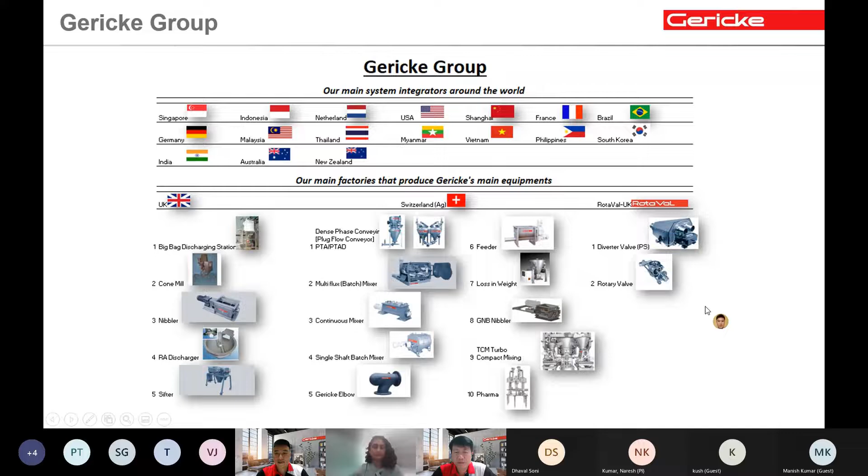All right, so INOS, Seema, you take over these slides. Thank you, Tom. I would like to introduce myself first. I'm Seema Soni, and I'm heading the customer support team at INOS. We started our journey in 2009 in India and have been a solution provider for pharma, food, logistics, and FMCG customers since then. We have our sales representatives and support people placed in Mumbai, Pune, Hyderabad, Bangalore, Chandigarh, and our head office is in Ahmedabad.

So we basically are close to our customers so that whenever there's an urgent breakdown for solutions and also for services, we can be in touch with the customer and make a visit to them immediately. Also, our technical staff is well equipped and well trained to handle IQ, OQ, DQ, FAT and SAT services as well. They are well trained for installation and commissioning that can be provided to the customers.

So we have been active in the pharma, food, and FMCG companies for a long time now, and we can provide solutions right from R&D equipment till packaging lines. So I think, yeah, Tom, you can continue now.

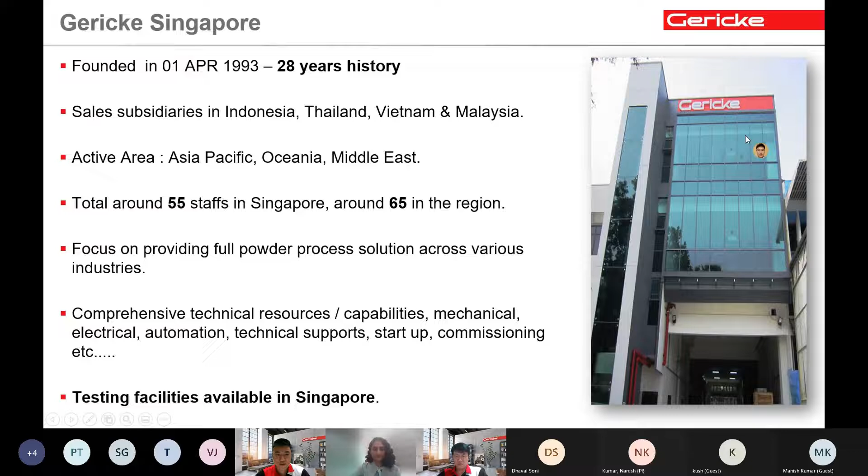And what is interesting here is if you have a look at our buildings over here, the second floor and the third floor are our test facilities. So if our clients or anyone has special ingredients or anything they would like to be tested out, always feel free to contact us and we can do the testing for you.

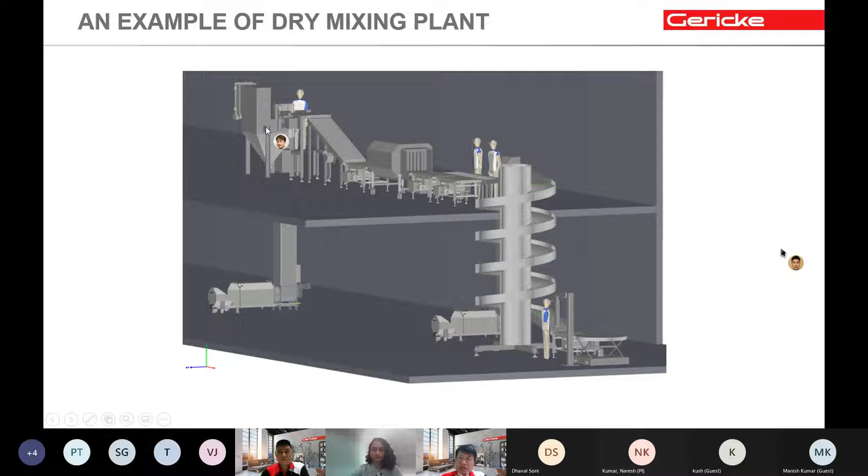In a typical plant setup, we normally have raw materials handling, where raw materials can come in 25 kg bags, 50 kg bags, or bulk trucks, and we have to deliver them up or on the same floor to a process level. From there, they pass through a wash, which we call ultraviolet if needed; if not, you go direct into a tipping station. From the tipping station, we deliver the powders to the mixing plant you see here. After mixing, we convey them into your filling machine. So this is just a simple setup of a simple blending plant. Of course, different factories have different unique requirements, and this will differ, and we are ready to customize solutions for you.

Tom, I'm just curious, sorry Tom, can I unshare your clip? Are you able to cancel your control already? Yeah, I just... yep, done.

Okay, thank you. So moving on, we cover how we handle raw materials. Today you may have already been handling raw materials that come in 25 kg bags or 50 kg bags. As you progress further and need higher capacity, you may want to request raw materials in bulk tankers. These are always available, at least in Asia—I know they're available for flour and for sugar. If you need this kind of technology due to capacity, we're here to help. We can help you convey the raw materials from a bulk tanker into a silo. The silo can be indoor or outdoor, with the right instruments, explosion protection, and so on, depending on the materials you're handling. This is one opportunity to save costs, because as your product consumption increases, instead of 25 kg bags you bring in a bulk tanker, saving costs in terms of raw materials handling.

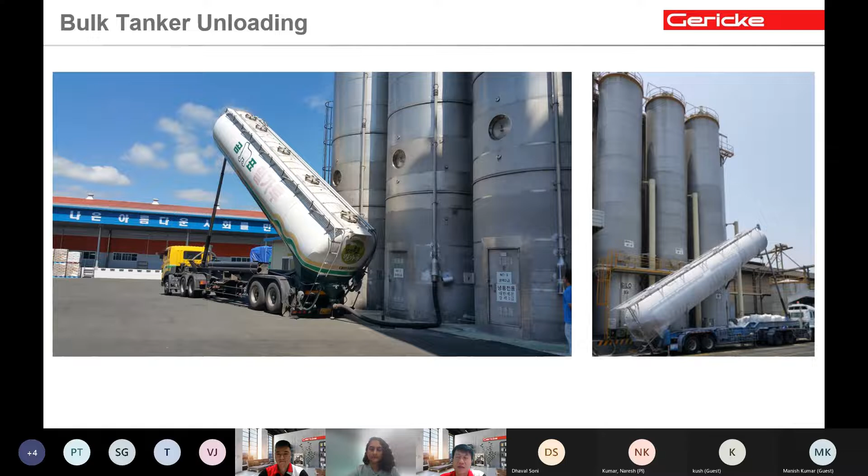For 50 kg bags and 25 kg bags, there are many ways to handle them. We start with operator safety first. When you have a lot of bags being tipped by operators, if you don't provide some sort of lifter machine, they will need to bend, and operators get injured easily, leading to medical insurance costs and so on. So nowadays, in more modernized factories, a lot of them are improving their safety by using what we call palletizing—something like a spring-elevated or even hydraulic system, where you put pallets of 25 kg or 50 kg bags on this machine. As bags are emptied from the pallet due to the weight, the spring lifts the pallet up. This way, the machine is calibrated so your operators always maintain a certain height and don't have to bend too low to pick up the bags.

Sometimes your raw materials come in on the ground floor, and your tipping station or process line is on the upper floor. You can choose to move these bags using a lift, forklift, or goods elevator. And sometimes this is not available, there's a technology in the market we call vertical conveyor.

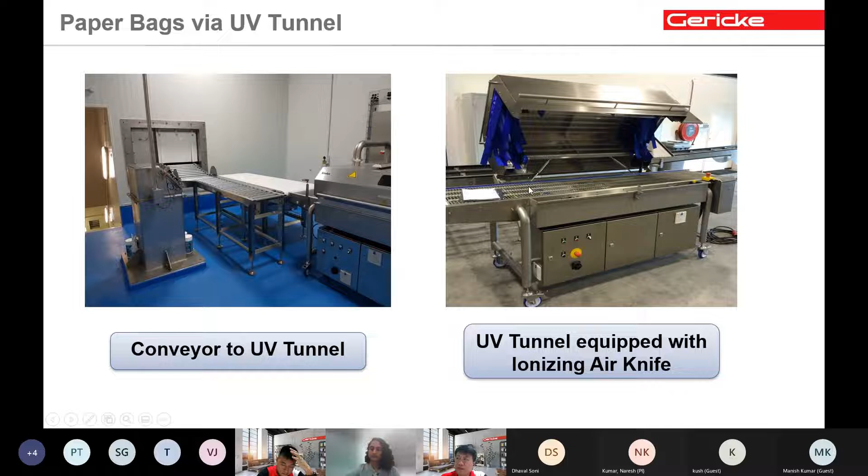Back to a more basic system. When you have 25 kg or 50 kg bag tipping, if you don't design them properly, you'll see that your operating area is always very dusty. Basically, what we recommend for a proper 25 or 50 kg bag tipping area is a tipping station.

A proper table for operator safety to rest the bags and cut them, and a filter located at the top of the tipping station itself, plus a fan to always create negative draft so that your powder does not leak out during the cutting or dumping process. This is a standard tipping station we recommend for 25 and 50 kg bags.

If you have big bags, you will need to handle them a bit differently. You will definitely have a hoist to lift it up to the discharge point. At the discharge point, you will either go for a vibrating table or a device called an agitator to agitate the powders to come down into the downstream system.

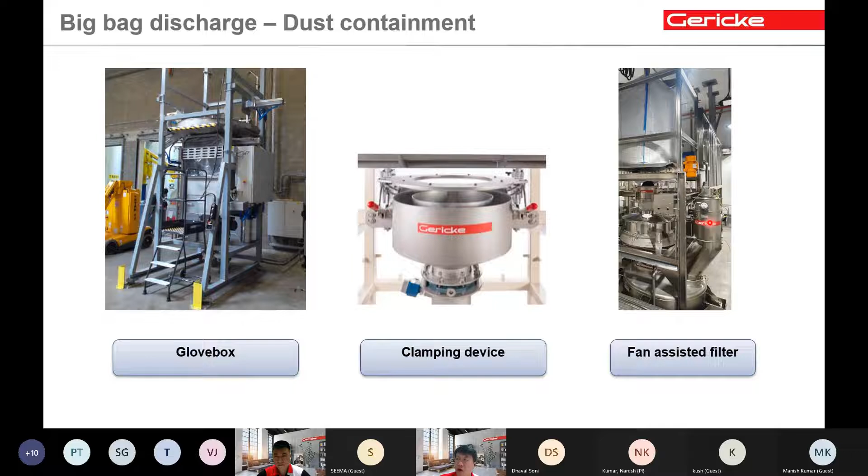Sometimes you'll notice a lot of foreign bodies in your raw materials and need to sift, but have no place to put a sifter. So on the same floor, there are solutions where you can combine a tipping station and a sifter at a height comfortable for operators to tip. This is what we call a tipping station direct to sifter solution.

We always recommend every tipping station come with a standard 40 by 40 mm grid. This prevents knives or other foreign bodies from entering the system. We can also put them on rollers so you can shift left to right if you have two destinations for operators to tip.

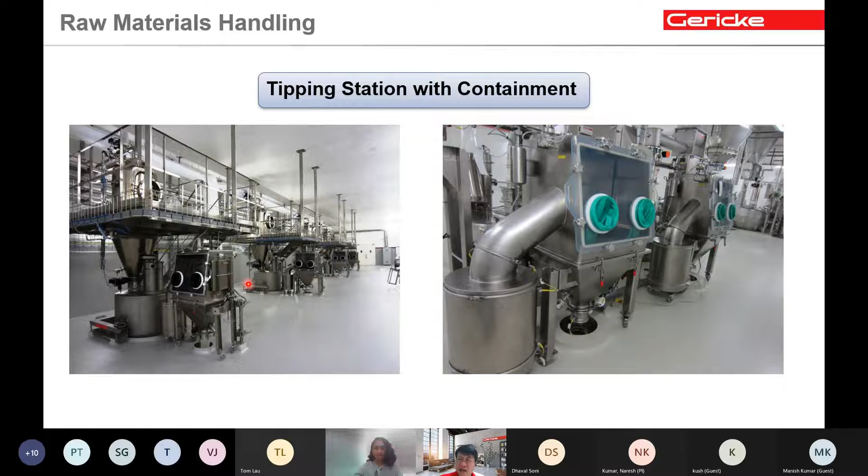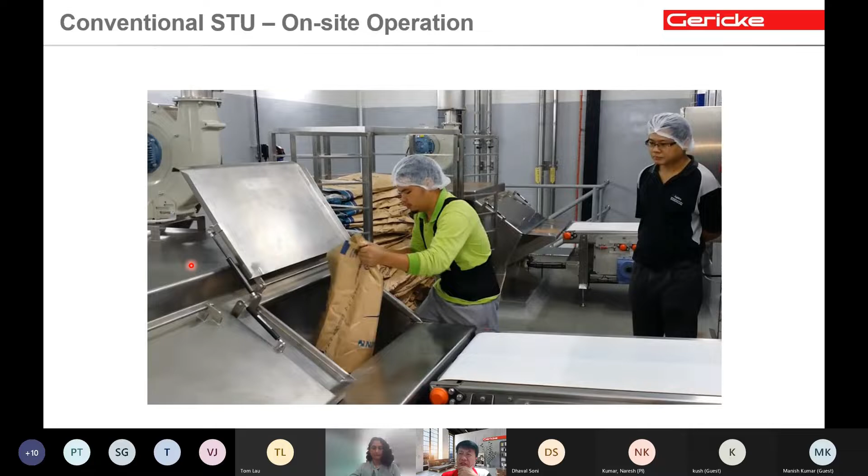I will show you how operators typically tip the powders. Normally the tipping station comes in, operators cut the bag and tip it, and there's a dust extraction system. This way the dust stays in the tipping station, maintaining a dust-free environment. This is a typical tipping station for 25 or 50 kg bags.

Today we also have another interesting solution with this kind of design, where the cutting is eliminated and the process is much faster. Let me show you this video.

As you can see, similar to earlier, the operator now doesn't need to cut the bag. The bag comes in on standby, the operator presses a button, the bag slides down and gets cut by itself. Then the operator just needs to lift up the empty bag.

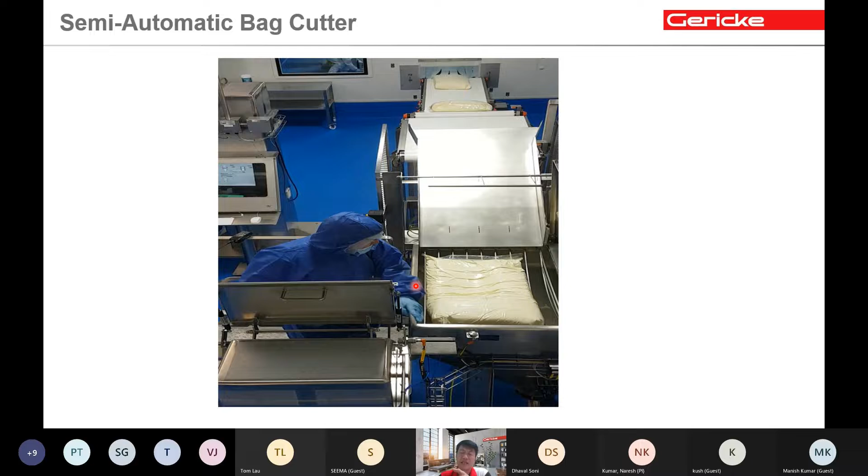This kind of setup, compared to the earlier one I showed you, is 200% more efficient. That means what used to require 2 operators can now be done with 1 operator, and you can easily achieve 6,000 kg per hour of throughput into the system.

For raw materials handling, you have powders in 25 kg bags, 50 kg bags, and big bags. Sometimes if you handle certain hygroscopic powders, like cocoa or sugar, when they sit in your warehouse too long and operators tip them, you'll see a lot of lumps. When you have lumps, your operator has to manually crush, separate, or delump them.

There's a device called a delumper, where instead of operators manipulating the powder, you pass it through this nibbler or delumper, which has a paddle that gently pushes the powder through a screen. This machine is designed to delump, not to mill, achieving 99% of the original powder's properties. So if you have lumpy products, you'll need a nibbler or delumper to achieve good product quality before introducing it into the system.

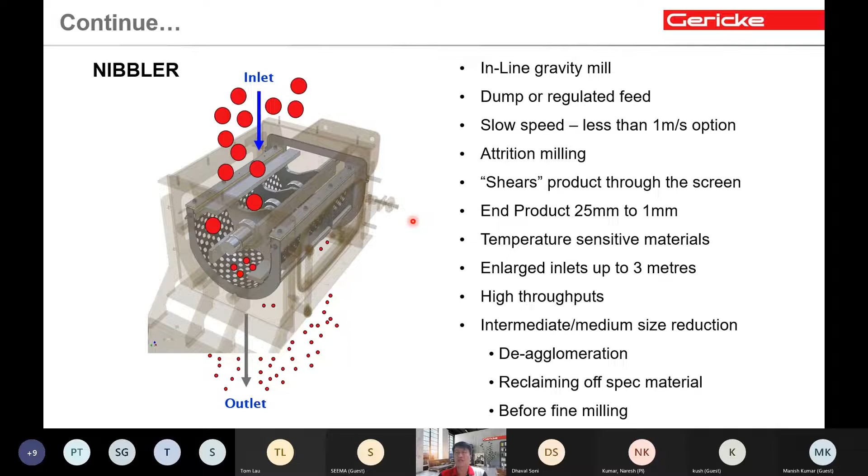I will show you how a nibbler works.

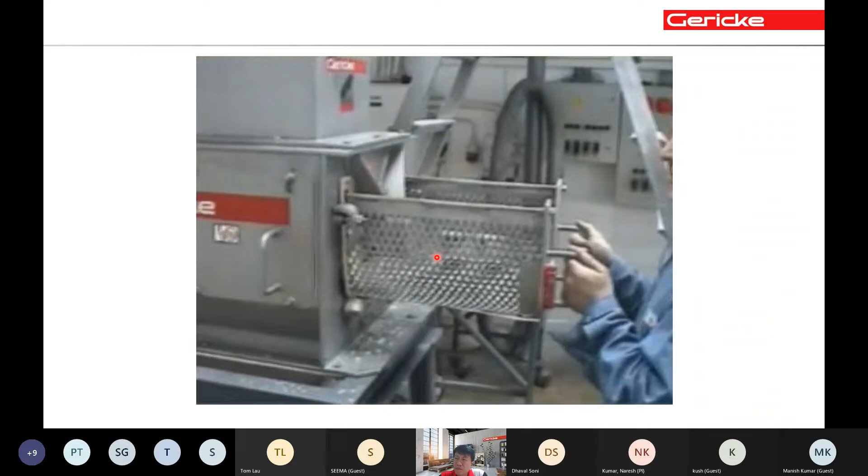It comes with a basket to control the screen size. So you can see now the very lumpy powders. By passing through this nibbler, we don't destroy the powders, but we try to delump it. So the word is delump.

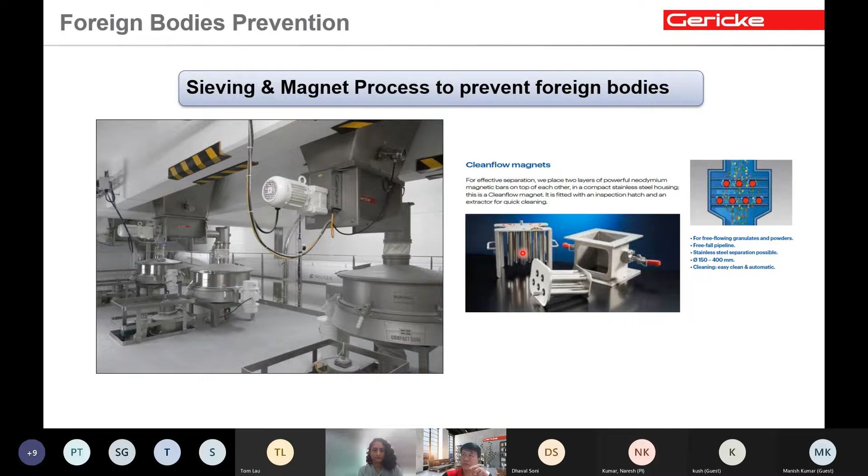Of course, to organize it properly, you start first with a 40 by 40 millimeter grid at the tipping station. This prevents anything bigger than that. After that, you pass them through a sifter, and then through a magnet. So a simple configuration of these three will give you the most basic foreign bodies prevention, and this is normally applied at raw materials handling, that means at the very front of the line. Then as you go down through your process, to your blending process, and then when it comes to your filling machines, at the very end, you will have a similar setup.

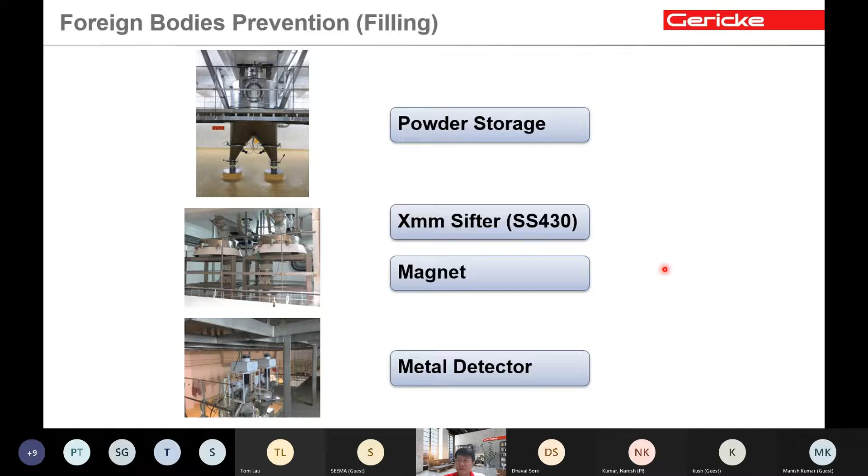This we call centrifugal sifting.

Another type for the same process is vibrating sifting. It works by passing the material onto a screen. The screen and the machine will vibrate, and the powder will pass through the screen and discharge downstream. So why are there centrifugal sifters and why are there vibrating sifters?

It depends on the powders. If your powder is really very challenging, sticky, or maybe not very free-flowing, we will recommend centrifugal sifters. Centrifugal sifters have the advantage of pushing not-so-free-flowing powders through the screen. The same difficult product may not work on the vibrating sifter.

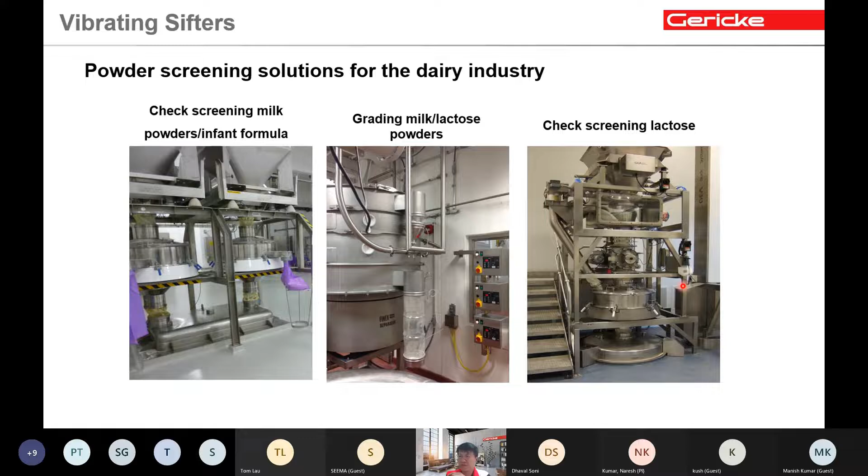To add on to raw materials handling, sometimes you have a process where you need to convey powders using air. Even at that point, you already start with foreign bodies prevention. The air intake, before it comes into contact with your powders, must pass through a HEPA filter — whether H7, H14, or HEPA filter standard, depending on the requirements. It is always recommended to put a filter before the air comes into the system and contacts your powders.

Foreign bodies prevention also applies to machines that are operating. Certain machines have very tight clearances — for example, a rotary valve, normally used in powder handling. Rotary valves today can also be a source of foreign bodies. To prevent this, we have developed a RotaSafe detection system, where if there's close contact, we will detect it and stop the rotary valve. This is also part of the foreign bodies prevention program, but applied to the equipment itself.

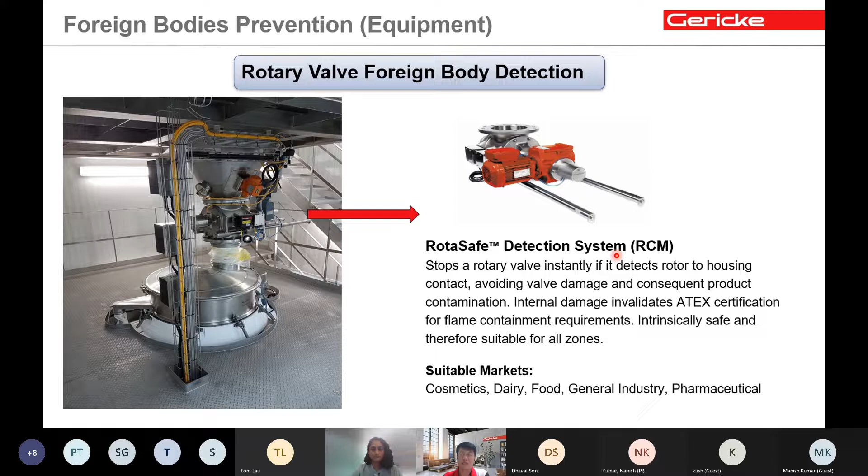Before I move on, there are two questions from the ground. One: how do we shift bulk powder from 25kg packs to the 4th floor, approximately 30 meters high, with a quantity required of 4 metric tons per hour? I recommend a tipping station at the ground floor, then pneumatically conveying them to a receiver that's 30 meters high. To shift something from ground floor to 30 meters, you have other options — you could put them on a pallet.

You can have your forklift going into the lift, operators moving in the lift, or a lift lifting up to 30 meters. But you can imagine the logistics involved. So a lot of factories today have a tipping station on the ground floor, and we just convey pneumatically using air to blow the powders up to 30 meters. We put a receiver here — all the powders come here, and then this is introduced downstream, which we will cover in this chapter on how to meter and convey powders into the receiver.

Next question: is the sifter ATEX approved? Yes, the sifter is ATEX approved. Both the vibrating and centrifugal sifters are ATEX approved. We classify internal zone 20, external zone 22, designed for powder dust ATEX. The machines, of course, are made in Europe.

For pneumatic conveying of salt and sugar, do we have an auto CIP system? CIP drying — this is always a question asked by customers. We don't recommend CIP, which means cleaning with liquids. We always recommend segregation of lines, using air to clean, and then leaving the dust in the system. So if you're conveying salt from point A to point B, after conveying, we just continue to run the blower, using air to blow clean the system.

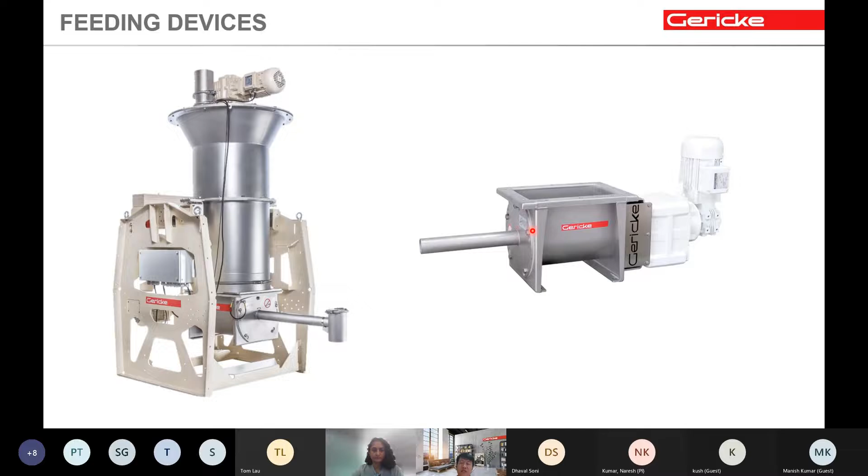You can also feed, if the conveying distance is very short, half a meter or 1 meter, this can be achieved with a metering device: a screw, a vibrating tray if you do not want to damage the powder, or a simple rotary valve where the conveying distance is just vertical up and down. The rotary valve is also used to meter powders into the conveying line.

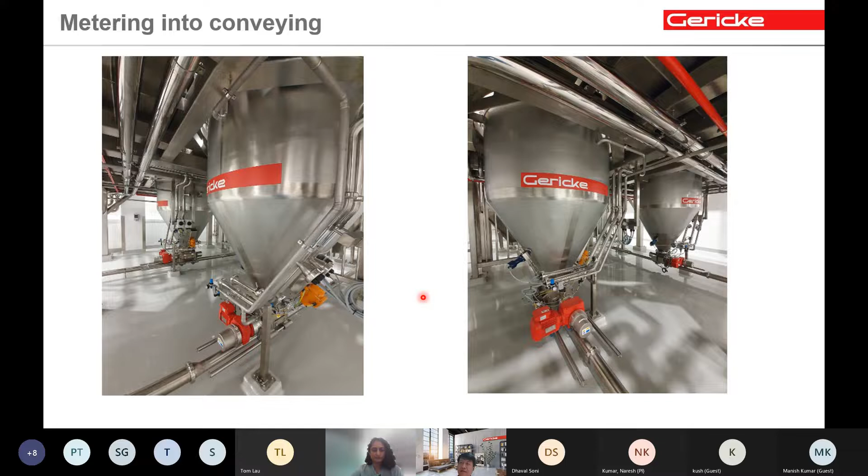I will show you now an add-on video of how we manage the raw materials at the front, and later we will have another chapter with details on pneumatic conveying, how we convey the powders. Before we answer the next question.

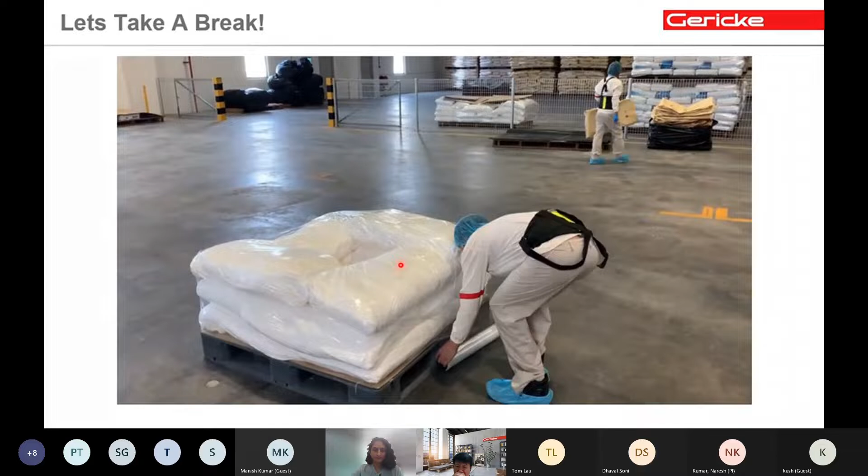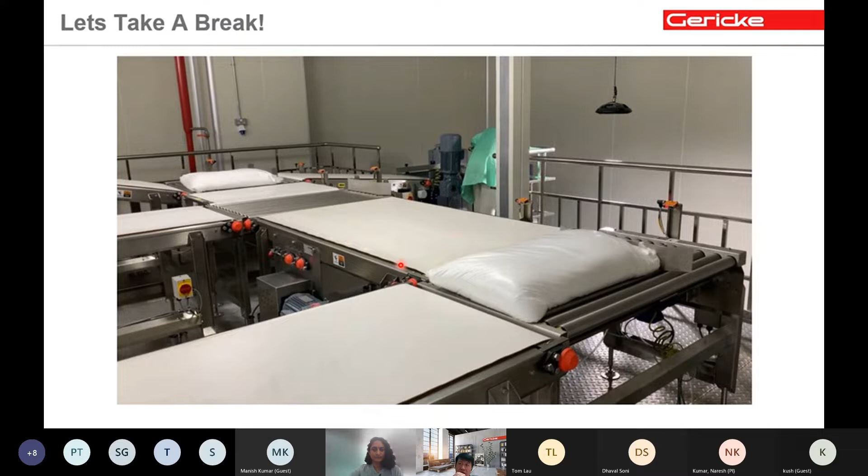The vertical conveyor shown here is 10 meters high. We deliver the raw materials to 3 different destinations, 2 with manual cutting and 1 with auto cutting.

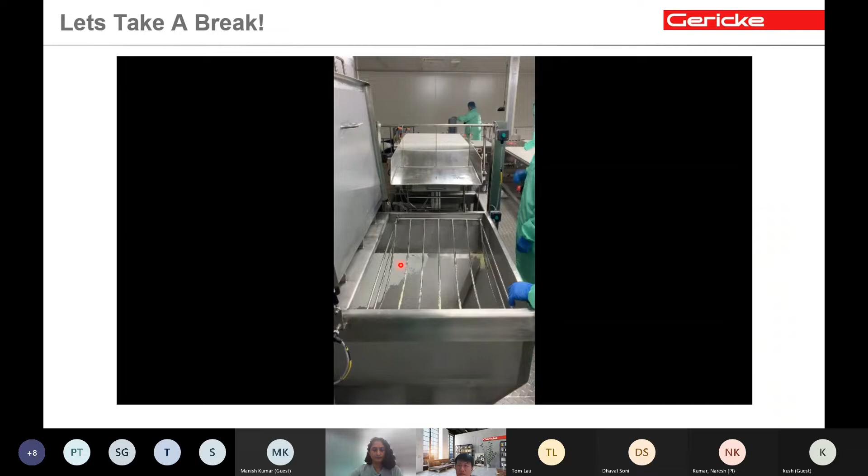Okay, I will not answer... One of the questions that comes in is, does the system come with explosion suppression, static dissipation, and so on, for conveying with air? It depends on the products. If you're handling explosive products like maltodextrin, then we will have to design an explosion protection system at the receiver or at the point where we determine the source, the ignition source. So yes, it's possible to come with an explosion protection system, with venting and suppression. I actually have a chapter on explosion protection, but we will not cover it today.

If you're interested, contact SEEMA and we can do a chapter on explosion protection, which also covers static dissipation. As a standard, all the equipment that we install or recommend always needs a grounding cable so you do not have any static electricity build-up as you handle powder processing. Especially, we recommend a dry area for handling.

Next question: can this system be used to transfer anhydrous dextrose powder? Honestly, I have no relevant experience with this product, but dextrose sounds like maltodextrin, a sugar-based powder. We have conveyed maltodextrin before, and it's always possible as long as your powder is dry and free-flowing, it's easy to convey by air. However, if you do not know the powder properties, send us 1 liter of sample.

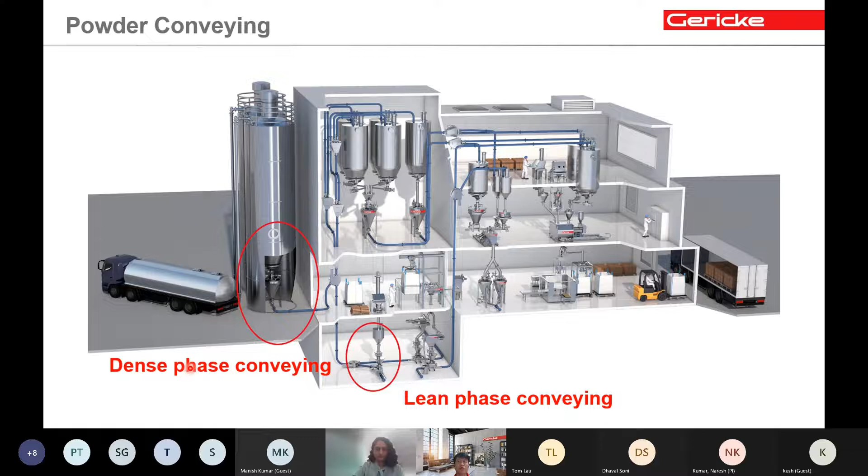Now we go into details of powder conveying. There are 2 technologies used: one we call lean phase conveying, and one we call dense phase. Lean phase means a lot of air, little powder. Dense phase means a lot of powder, little air. Why are these 2 technologies necessary? That is what I want to share.

Basically, to move powders with air, you have a simple setup: a hopper or tank to introduce the powder, a feeding device like a rotary valve to feed the powder into the pipeline, and a blower to introduce air into the pipeline, which in turn brings the powder to your destination. After mixing with the powders, you have air and powder moving together, and the powders reach the receiver.

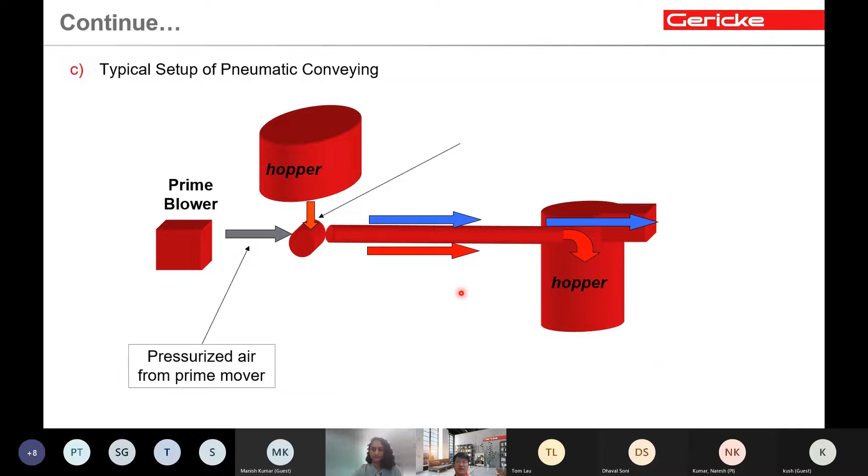I will put a filter at the receiver, and the air gets filtered out. So this is a typical setup of pneumatic conveying, whether lean phase or dense phase. You will have the same concept.

But why is there a difference between the 2 technologies? Lean phase, as I mentioned, in layman's terms, just remember you have a lot of air and very little powder. So the concentration of product versus kg of air is 5 to 20. Dense phase, you can see, is reverse. Concentration is up to 120 kg of product to 1 kg of air. Why do we need these 2 different technologies again?

It's because of the air velocity. Air velocity for lean phase is 20 to 60 meters per second. Air velocity for dense phase is 2 to 15 meters per second.

For dilute phase, we use it because we convey almost all kinds of powders where we do not care what happens at the end of the pneumatic conveying process. So lean phase is normally used in raw materials handling. But after you mix the powders together, if you were to use lean phase again, the powders that are mixed will be separated again. So to prevent this, while still wanting to pneumatically transport, we use dense phase transport system.

This is where you pack the powders into compact blocks and move them very slowly. By moving it very slowly, you prevent segregation. In addition, dense phase also helps eliminate the energy used on the powders, thus preventing or minimizing powder breakage, meaning the density will not change much after conveying.

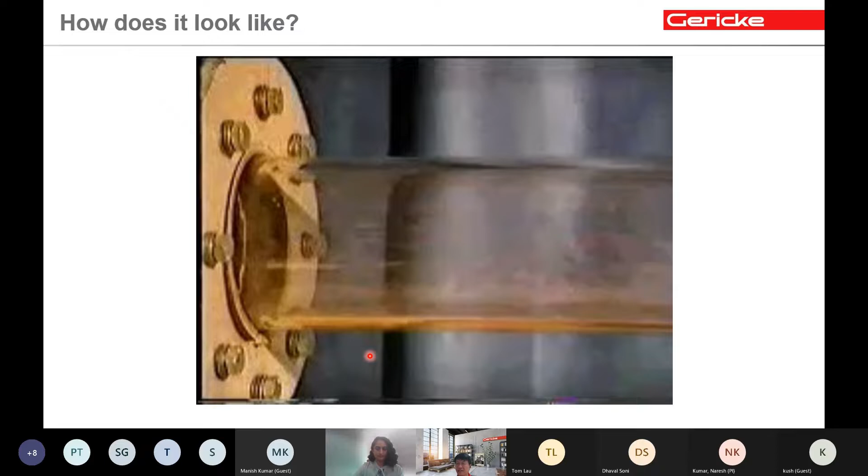Okay, just put this on. So I'll show you how a lean phase looks like, just to give you an idea. You can see a lot of air, very little powders. If you have a sight glass and slow it down, you can see this kind of picture in your factory. So this is basically lean phase used at raw materials.

If today you have this kind of system used after mixing, then something is wrong. There's a risk of separation, there's a risk of segregation. Okay, how does a dense phase look like?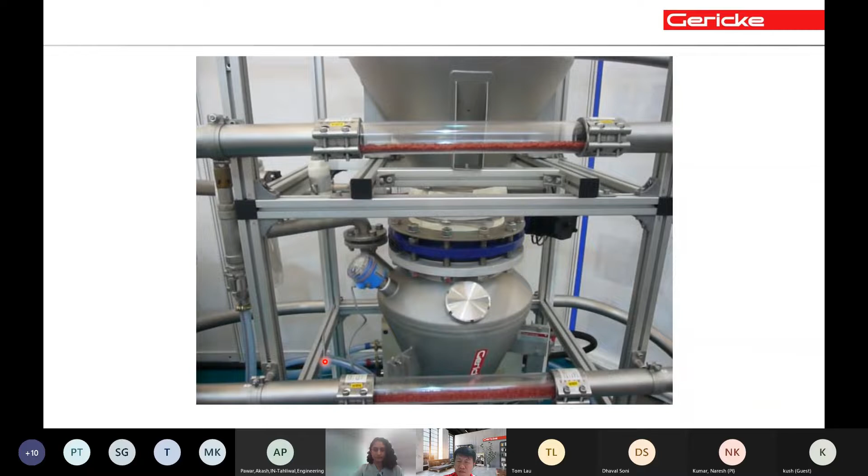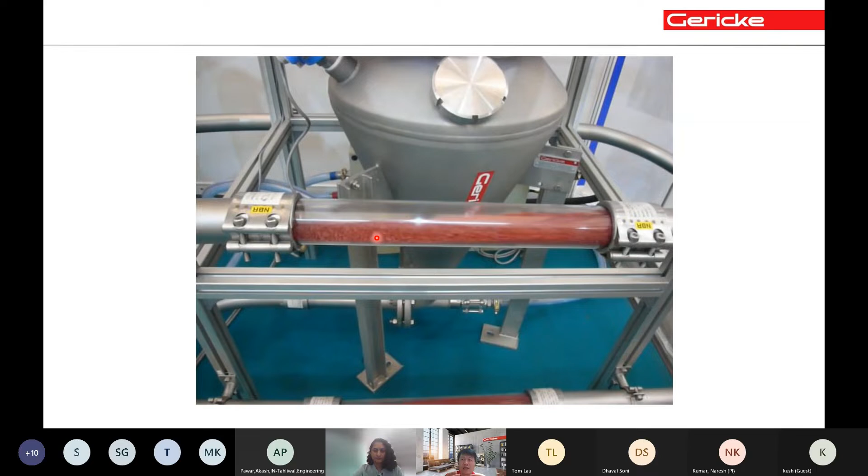Okay, you can see now with the dense phase, we are moving the product very slowly, 5 to 8 meters per second. Even with your naked eye, you can see bunches of powders being moved from left to right. This is how we eliminate the product from more breakages, more damages, and also how we keep the product compact so that it does not get demixed.

All right, so this is the basic concept, lean and dense phase, when we use lean and when we use dense. Now we go back to lean phase.

Lean phase, as I mentioned, is always used to convey raw materials. You can have multiple sources. You can have 3 tipping stations going into one common line, and then deliver them to multiple destinations. Conveying distance of 100 meters, 200 meters is also possible, but the bigger the piping size, the more energy you need to consume. The bigger the blower, the bigger the kilowatt, and so on.

Foreign bodies prevention is also possible along the conveying line, where you can install an inline sifter. Just now we mentioned that a sifter is used in the tipping station, right? Sometimes you have a bulk tanker going to the silo, and after the silo you want to do some sieving. You want to add this into an existing process - it's also possible. You can introduce an inline sieving along the conveying line, where the air and powders convey from the source into the sifter and then into the day bin.

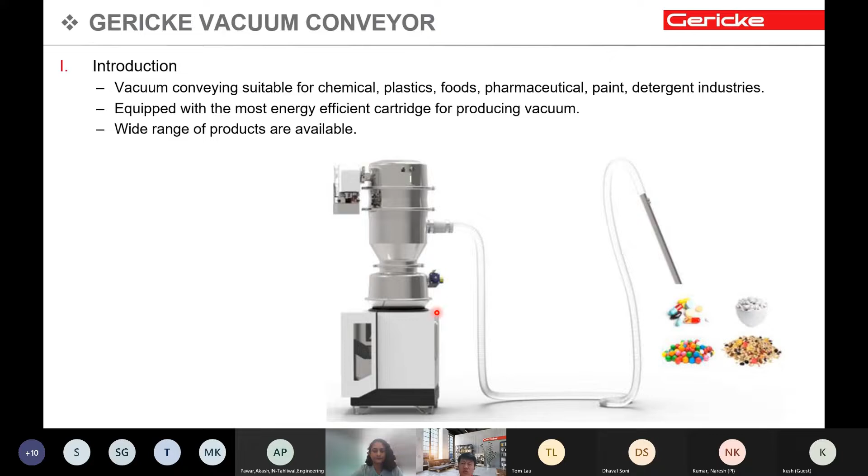Okay, a conveying system does not need to be huge. It can be as small as what I show here, just like your house vacuum cleaner. If today you have just 5 kg of powders and you want to lift them up to 5 meters high, it's also possible to design a smaller system. This we call a vacuum conveyor, where you have a suction probe like your house vacuum cleaner. You plug the suction probe into whatever container you have, and you can suck it over a distance of less than 5 or even 10 meters to your destination. So this is also available. I will show you quickly a video.

The receiver is specially designed to create vacuum. So when the vacuum is created, powder gets sucked and comes here. This kind of system we recommend for very short distances, less than 10 meters, and for smaller capacity, less than 1000 kg per hour. Anything bigger than 1000 kg per hour, or bigger than 10 meters, then you should go for a standard simple lean phase conveying system setup.

Okay, we touched on lean phase quickly, and now we touch on dense phase. Remember, dense phase is used to prevent material separation. So normally they are used after mixing, and they are used to prevent powder breakages. Normally they are used to convey powders produced by dryers. So if your factory has dryers where you introduce liquid and need to control the dry powders being produced by the dryers, and you want to move them over a distance, then you will need a dense phase conveying system. Dense phase conveying system uses compressed air.

In terms of energy consumption and capacity, it doesn't differ a lot from the lean phase, but in terms of investment it's slightly higher because you're talking about compressed air, pressure vessel tank, and so on. It's a technology you only use if you do not want to break the powders, if you do not want to demix the powder.

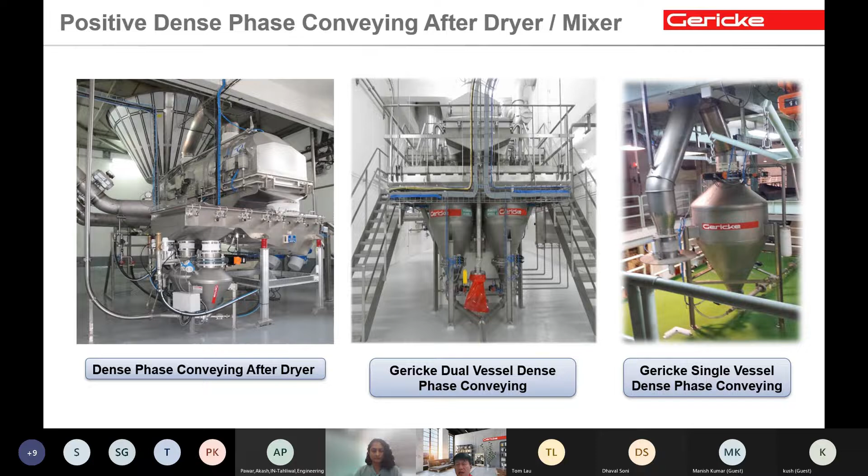Okay, dense phase conveying is also available - for information, this is positive. You use compressed air to blow. The compressed air is introduced into the vessel and then blows it to the destination. Sometimes you may not have compressed air available in your factory, or you do not like the idea of blowing - you want vacuum. Dense phase is also available in high vacuum, where we use a vacuum pump to create a vacuum of negative 800 millibar gauge. Instead of blowing, we suck the powder out of the silo or out of the tank, and convey it into a receiver. So vacuum is available as well for dense phase conveying.

Now you will ask, dense phase is already complex, and lean phase too - why do you need positive and negative? I'll give you an example. If today you have powders already in a big silo, and your silo is very near to the floor, there's no way to put a dense phase positive conveying system below.

So what we do, we cut holes from the silo, we put piping, and then we suck the powder up. This is one good usage of high vacuum dense phase. However, high vacuum dense phase has its own limitation because the force is driven by the vacuum pump at a maximum negative 1000 millibar. Not all powders can be conveyed by dense phase high vacuum. Positive dense phase is more robust. You can convey almost all powders.

So as we are touching on conveying, sometimes when you have an existing conveying system, you notice that at the elbow you always see easy breakages because your powder is too abrasive. Mostly used in the chemical side, if you have cement, then you have always breakages on the elbow. You might need this technology. We call it the Gericke elbow. Let me show you.

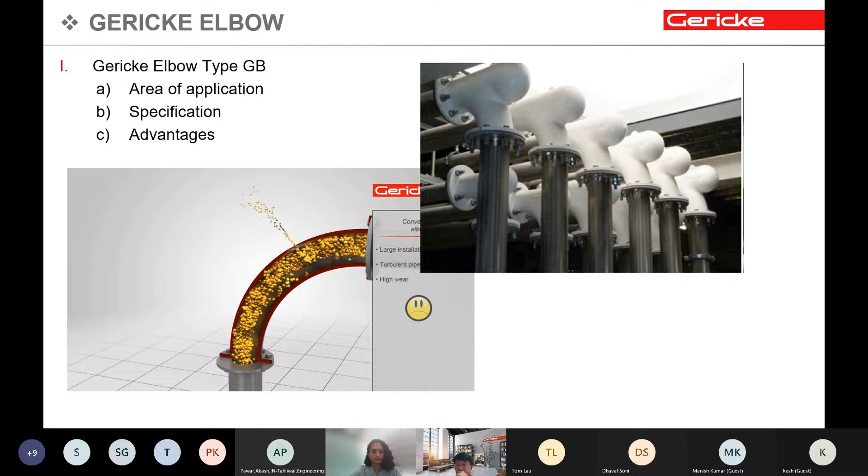So using a standard elbow, if your product is abrasive, you tend to have this kind of problem. We have a technology where we use the powder to cushion off this kind of issue, thus giving the elbow a longer lifespan.

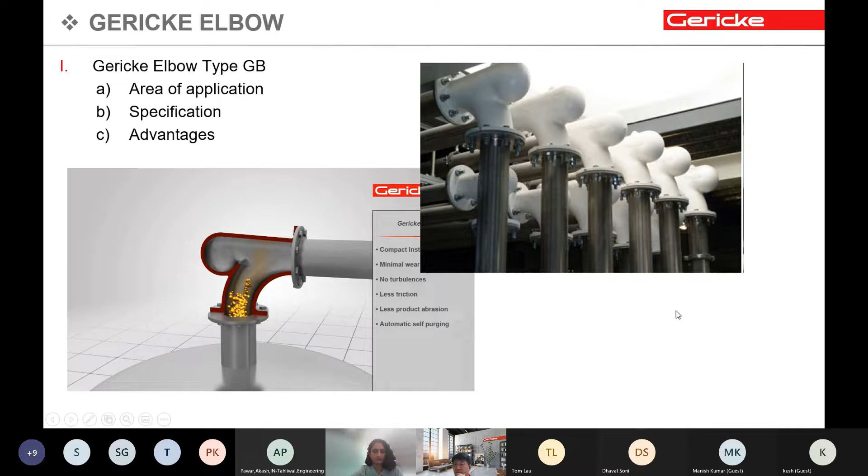All right, now before we move on to mixing, Seema, should we cover any of the questions? Yeah, so I think Santosh sir had another question, how to control dusting of low bulk density products as they carry a lot of RM and it results into product wastage.

If this is talking about the tipping station, then I will recommend, since your product is very light, at the downstream where you are doing conveying, I would recommend a vacuum conveying system. With a vacuum conveying system, on top of the aspiration system, you actually ensure that the powder doesn't go anywhere. So normally for very light density, like silicon dioxide, free flow additive of density 0.1, we will recommend the client to go for negative lean phase conveying.

So the vacuum at the bottom of the tipping station actually helps to keep the powders down and not going to the aspiration system. In addition, remember earlier on I showed you a tipping station where our filter is actually integrated into the tipping station. So whenever you have powders being sucked into the filters, our reverse cleaning system actually pushes back the powder into the tipping station. So your wastage is actually minimum.

Other factories, especially older ones, have a tipping station connected to a central dust collector. That central dust collecting system was good in the past for investment and so on, but as we modernize, we notice that this kind of piping connecting to the central dust collector, nobody cleans, so it's a hygiene issue. You have a lot of dust wastage because the designer of the central dust collection will always need to design a very big fan to ensure that your tipping station is dust free.

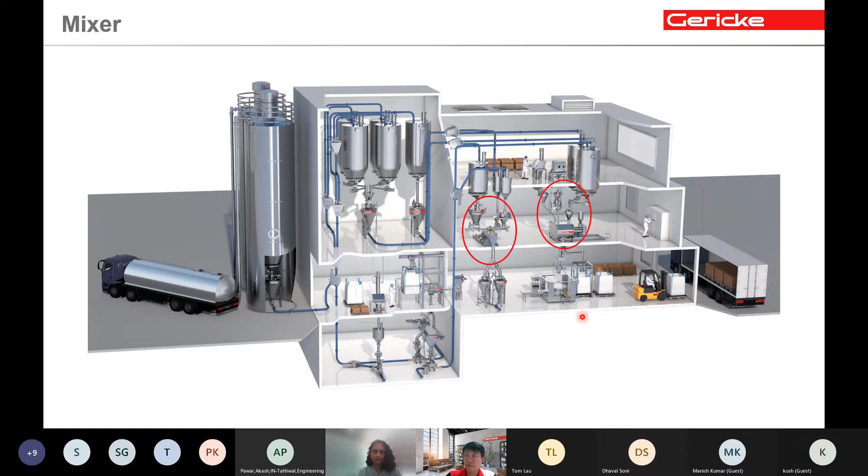So what is mixing? Mixing is basically introducing different kinds of ingredients with different properties, and you want to mix the ingredients together. At the end of the day, when you take a sample, it's a good mixture of A, B, C. And this is done, of course, using a mixer.

Batch mixing itself has many mixers in the market, which I will share with you now. So how do we define the type of mixer first? You just have to remember this number called Froude number, abbreviated FR. The formula is the rotational speed squared times the radius of the mixer, divided by the gravitational pull. This formula tells you the bigger the number, the mixer is either very huge or mixing very fast against gravity. The smaller the number, the mixer is mixing very slowly against gravity.

So with a Froude number less than 1, gravity forces are higher, and these types of mixers refer to tumblers and ribbon blenders. These are very slow and gentle because you don't introduce as much energy, and slow because you're mixing at a very low RPM. You'd expect this type of mixer to have 20 to 30 minutes mixing time - that's about 2 batches per hour. It's good because this is the first basic investment, relatively cheap, but you can't mix a proper recipe if the minor ingredient is less than 5% - you won't get a good mix.

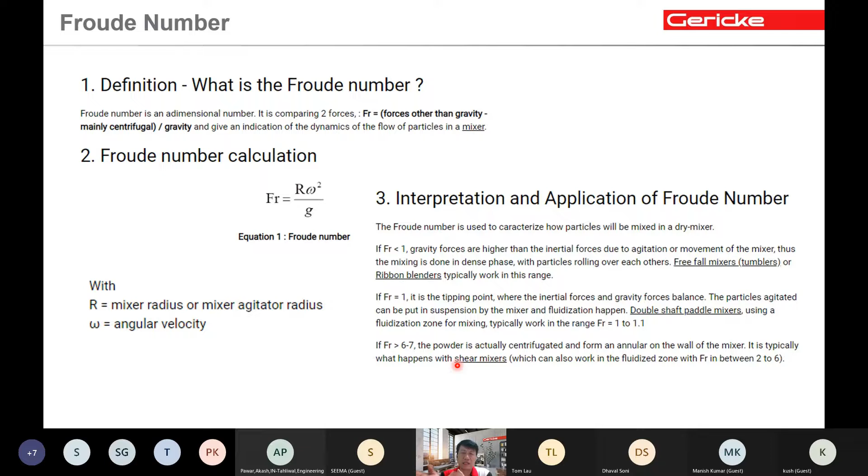With a Froude number of 6 to 7, these are very high speed mixers, called shear mixers. It's used when you're producing seasoning where you add oil and liquid, and you have chances of getting the powders into lumps because of the oil addition. This is where you want to use a mixer with a Froude number of 6 or 7 - we call these shear mixers.

So, Froude number less than 1. If you have this mixer, most probably you have it in your factory. These are called ribbon blenders, typically 20 to 40 RPM, very slow. Its job is to slowly mix so that I don't introduce any breakages to the powders.

This type is normally used in the paint industry. We call this the Nauta mixer.

Of course, both mixers have one problem. I mentioned earlier that we recommend dry clean, but it's very difficult to clean. So you are being forced to use water spray, water clean. You have to dry it up, make sure no bacteria. Drying can take 1 day after cleaning and so on. A lot of problems, so your factory cannot operate 24 hours easily.

You have another type, normally used for mixing micro ingredients. We call it the tumbler mixer. You put everything in the tumbler and then you rotate, and that's it.

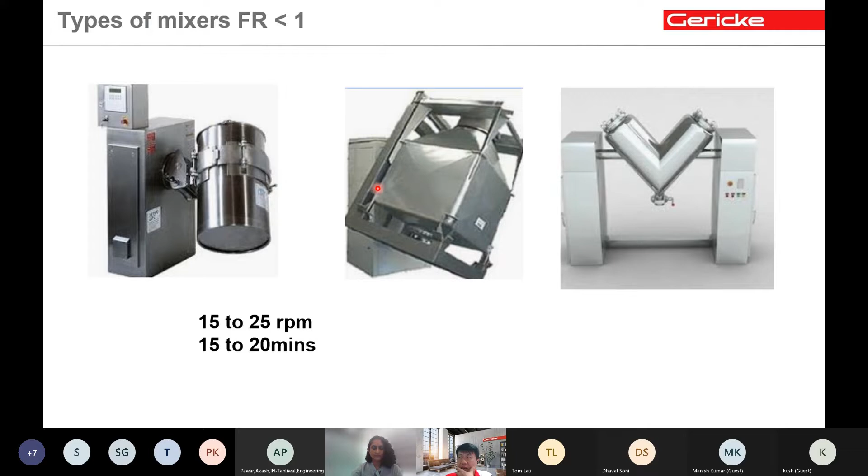So the mixers I've shown, ribbon and tumbler, are all good for simple flour mix, simple sugar mix, where you have 95% sugar, 5% flavor. You can use this. If your recipe gets complex, more ingredients, very minute micro addition, then you need fast and gentle mixing, so you will need the double shaft mixer.

You have the vertical technology and you have the horizontal technology. We are producing the horizontal because we highly recommend our customers do dry cleaning. You can see the horizontal mixer, you can extract the mixer to the back and then open up the front just for cleaning.

This type of mixer operates between 40 to 70 RPM, vertical 50 to 100. Mixing time can be 0.5 to 3 minutes. 3 minutes is actually for mixing infant milk, 0.5% of vitamins, 0.1% of probiotics and flavor. This is the typical mixing time for infant formula milk.

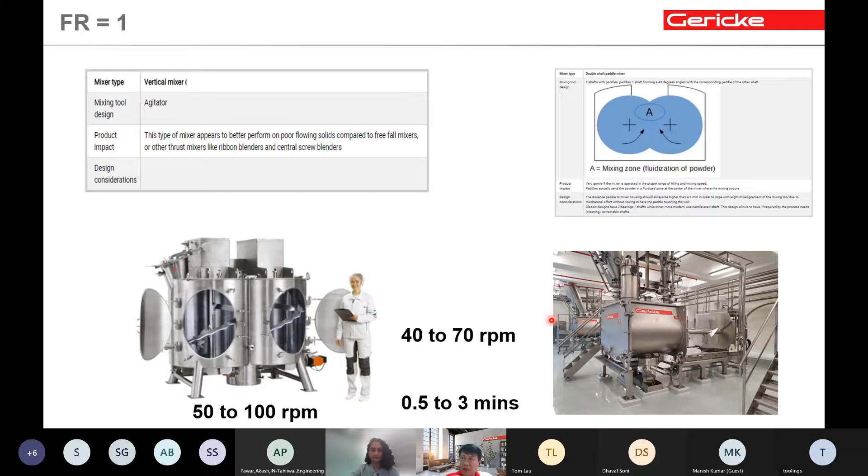Okay, I'll show you what I mean by gentle mixing. This is mixing of nuts and raisin. We start at 0, and you can see in less than a fraction of a minute, you get mixed. We run further just to check that it's gentle enough not to destroy the raisin.

Raisins are very soft black currant treats that you may have eaten before. If you use your finger to press it, it actually gets broken. So this mixer is running just to show you how gentle it is.

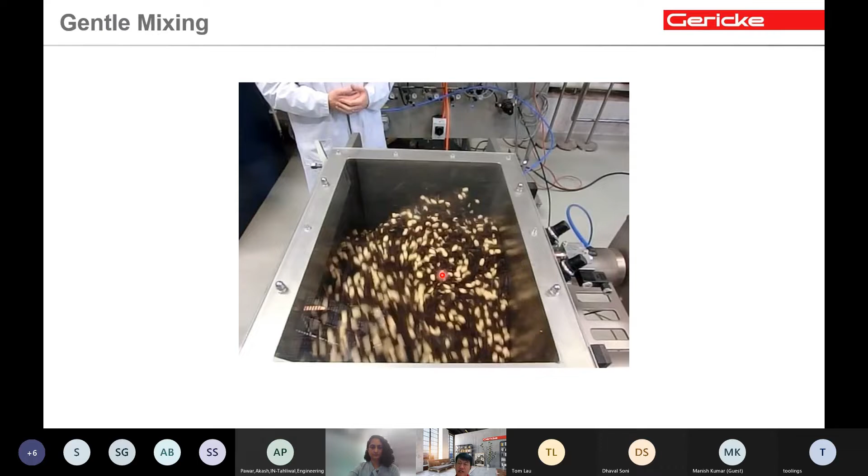These are the strengths of a double shaft gentle mixer. Normally today they are used in Nestle for infant milk, for infant cereal, because you need gentle mixing, you don't want to break the cereal. Of course, we also apply it to Nestea, 3-in-1 coffee, and Milo.

Now, when you start to add oil, you produce seasoning, you add oil, you add butter. This is where the Froude number more than 1 mixer comes in, the shear mixer, where you need to break the powders back. These typically run at 60 to 100 RPM or 70 to 80 RPM. Our mixing time is 1 to 5 minutes as well, because they move very fast, a very short mixing time, but at the same time, they break the powders also.

So we use this when you have to add liquid or oil. Today they are being used mostly in seasoning production, salt and Maggi sugar, for cooking soup and adding this kind of seasoning. We also use it sometimes with drinks, 95% and 5%, because they want to break the final product more, so we use them on drinks as well.

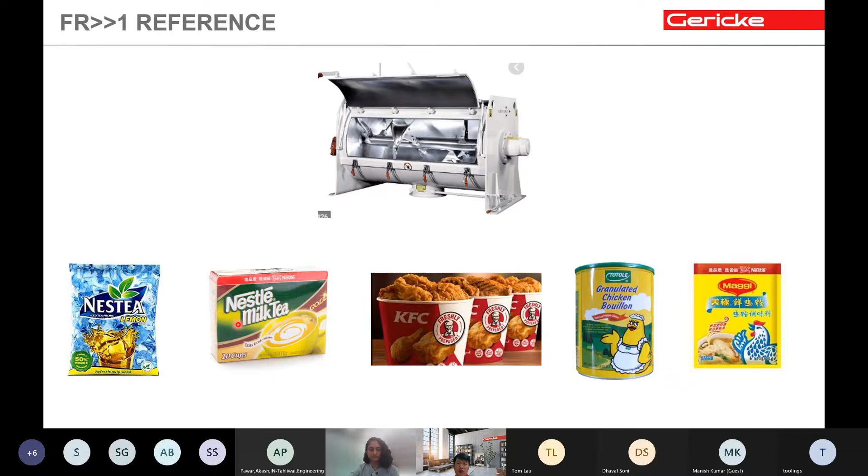So what determines the mixing time? First of all, the mixing volume, the bigger the mixer, the longer mixing time you'll need. Then the mixing speed, the higher the mixing speed, the shorter the mixing time. And of course, the Froude number, the higher the Froude number, the shorter the mixing time. But take note, it also means it destroys the powder more.

So selection of the mixer is important. If you ask me today, you want to mix ingredient A and B, 50%, and you have a lot of time to mix, then okay, go for the Froude number less than 1, it's one of the most cost-effective investments. But if you have a tight space, need to produce a lot, and need to do 6 to 8 batches per hour, then you have to go for the double shaft mixer.

If you want to add oil, and there's a risk of lumping after adding, then you will go for the high-speed mixer, the shear mixer. That means the plowshare, the high-speed vertical mixer, and so on.

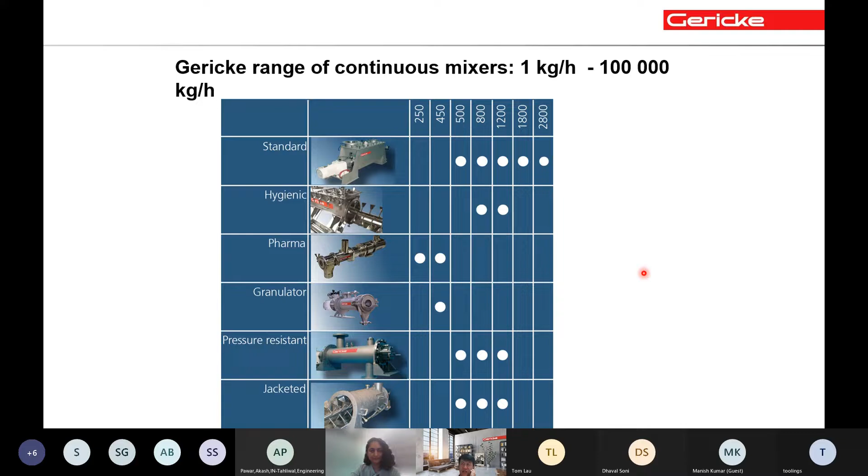We have continuous mixing, which we did not cover, but we can produce from 250 kg all the way to 2800. Today we deliver them to one of the biggest pharma companies in India.

It's Cipla. We deliver to Cipla for pharma industry continuous mixing production. These are typical continuous mixers. The mixers we produce cover all 3 ranges: double shaft with froude number close to 1, and froude number more than 1. What we don't have is froude number less than 1, but we have partners who can deliver those solutions as well.

Okay, we talked about mixing. Now I need to elaborate a bit more on demixing, because if you invest in mixing, you do not want to demix it afterward. So understand a bit about what demixing is. Demixing happens when...

So take note that after mixing, unless you go direct to the filling machine where you have no problem, if not, in the process between mixing and filling you have more steps. You have to select the right materials or equipment to ensure demixing doesn't happen.

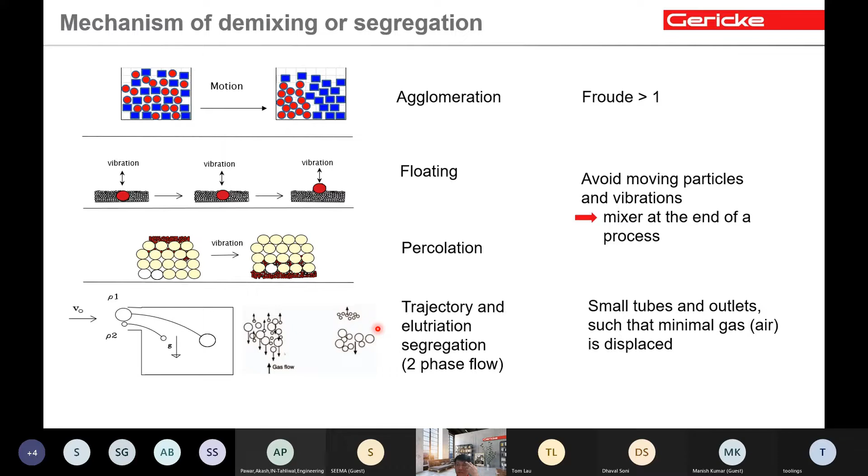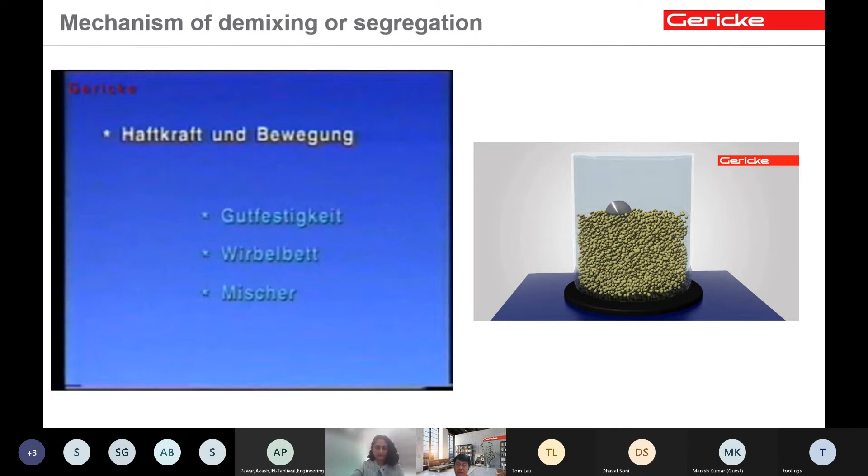After mixing, normally you put the material into an IBC bin or big bag storage. Make sure that during that handling process, there is no much vibration introduced, because if you have vibration, then this kind of separation will happen. On the other hand, after mixing, if you drop them from a very high height, you can also see separation. You normally see this in the example of a landfill, where the bigger particle size comes from outside and the finer particle size goes inside.

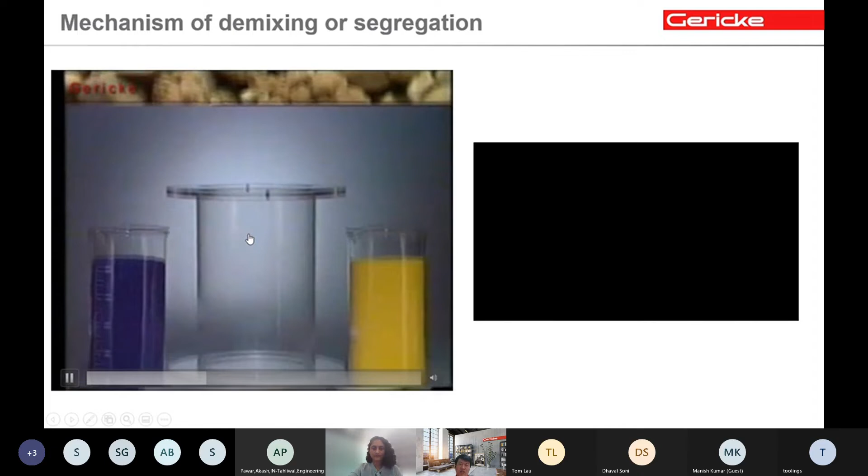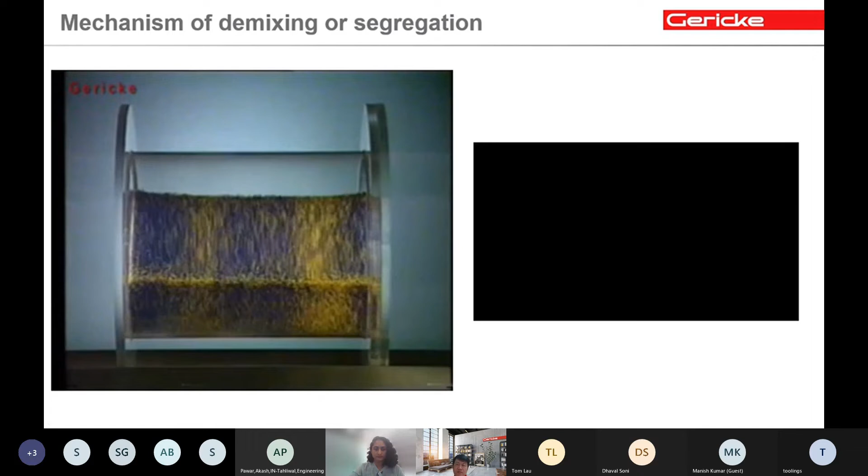Mixing time is also critical, especially in a tumbler mixer. If you mix too long, it can also cause separation. Once you commission the system to mix at 3 minutes, it doesn't mean 2 times the mixing time will give you better mixing. If the mixing time is too long, the materials actually get separated because of the forces combining them. You can see it's good now, but if we extend the mixing time, the powders de-separate again. So once mixing time is defined, do not change it, do not extend it, do not lessen it. All this will impact your final product.

Okay, we've covered mixing, and I think now is a good time to answer some questions, Seema. I don't think there are any questions related to mixing.

Just a second, Sanjeev sir is asking about the application of high shear mixers in mixing milk fat in water or skim milk without risking immediate separation. How can we do that?

If you want to mix milk fat in water, we don't do fat and water mixing. But if it's powder and powder mixing, and you have high fat milk, I would recommend gentle mixing with a double shaft, not a high speed mixer, because the high speed mixer will break the properties of the milk powder and you'll get fat segregation. For milk powder mixing, I always recommend either single shaft paddles or double shaft gentle paddling.

Okay, we can continue. I mentioned earlier we talked about cleaning. Now that you've finished the mixing process and delivered to the filling machine, it's time to clean your machine.

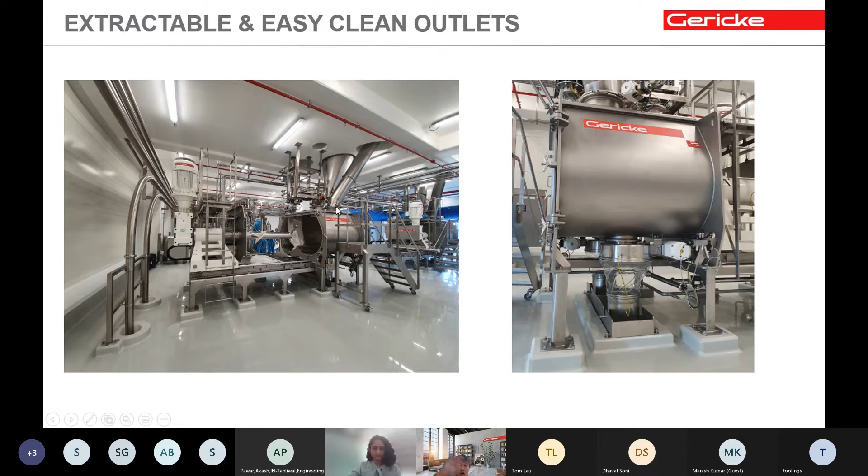Mixers, the first equipment that you will invest in, of course have to be designed with dry cleaning capability. We have mixers that are cantilevered, that you can extract, leaving only the housing to be accessed for dry cleaning. Okay, I'll show you this video.

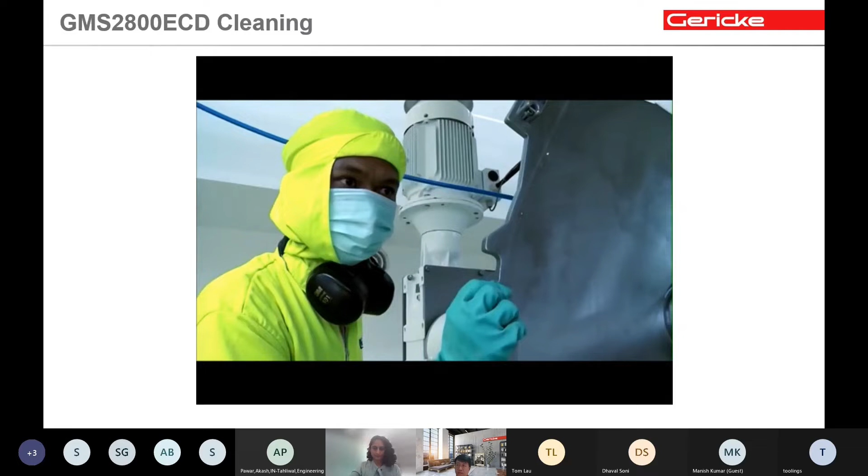This mixer, by the way, is designed for 1000 kg of powder.

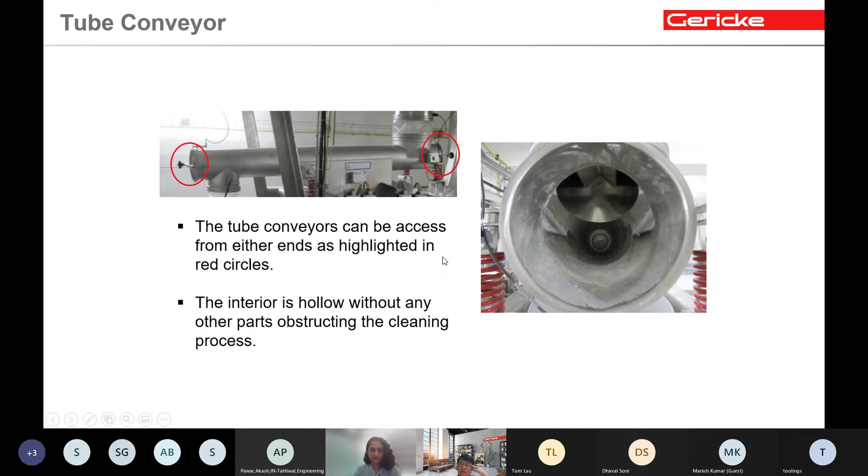Now, for feeding, of course you can have vibrating tube conveyors, you can also have screw feeders. Vibrating tube conveyor is basically a tube that's always accessed at the front and the back for easy cleaning. Our feeder design comes with easy access front opening where you can open, remove the screw, clean it, and then put it back.

Rotary valve, because the rotary valve is compact with tight clearances and heavy, there are ways to clean it easier, and we do this with rails. Similar concept as the mixer.

So you can see it's easy to remove and insert the rotor. You will not need much special tool except for one spanner to remove the nut at the end cover.

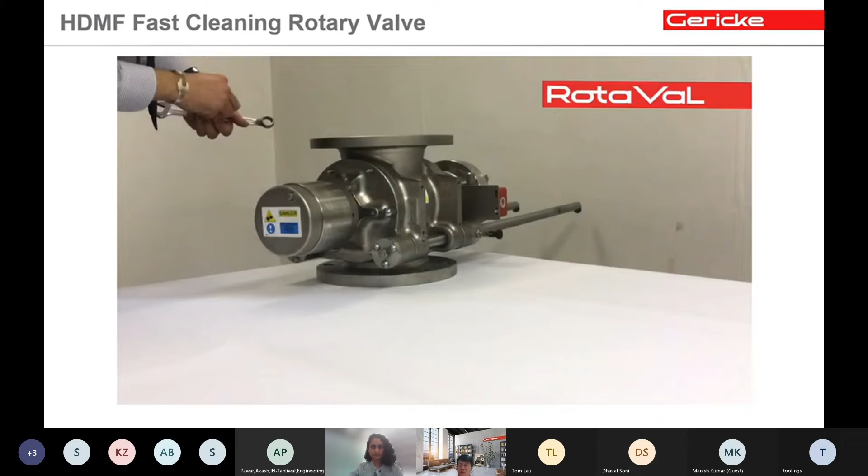The rotary valves are made by our company Rotaval, which also belongs to Gericke.

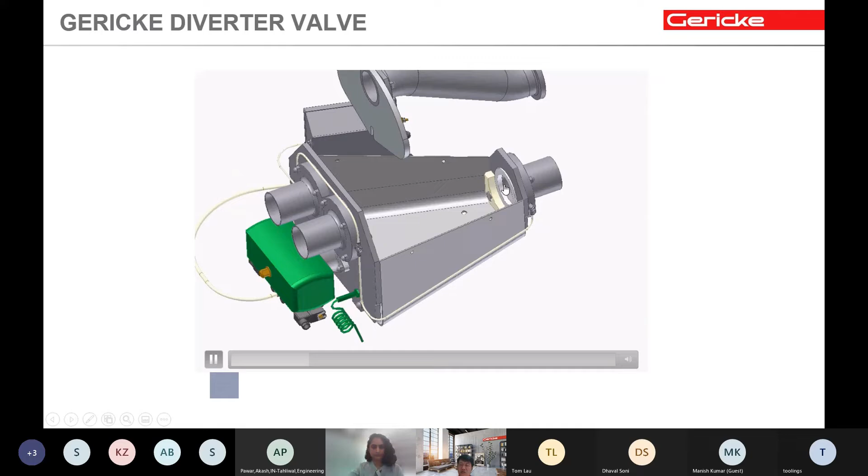So of course, I mentioned earlier on that we can divert the conveying to multiple receivers. We have a diverter valve that helps to divert to different receivers, and they are also available for easy clean. We're removing one nut, you can remove this, and then this is where you stop and clean. Of course, if you want more detailed cleaning, you can also access individual points for cleaning of the gaskets and so on.

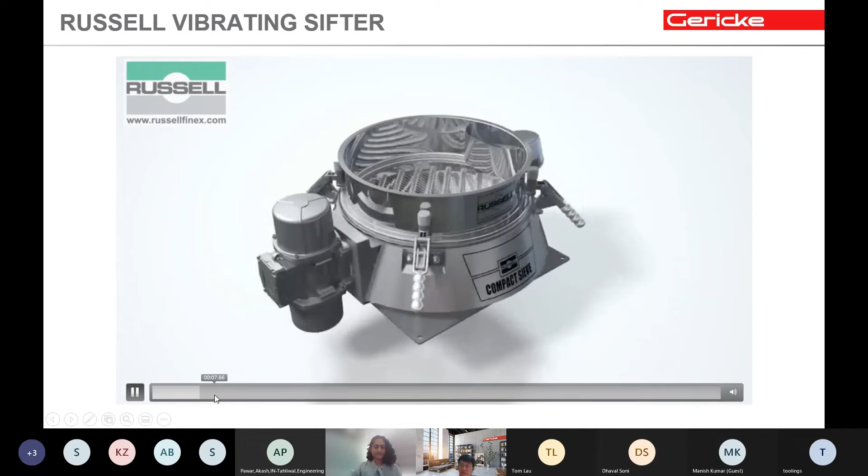Moving on, we mentioned about foreign bodies prevention, which is important. So you have the sifters, then you will have the vibrating sifters that are easy clean. These are coming as a unit from Russell. We are partnering with them to deliver a full turnkey solution because Russell only sells components. So when they come to system solutions, they will introduce us and then we will come to you.

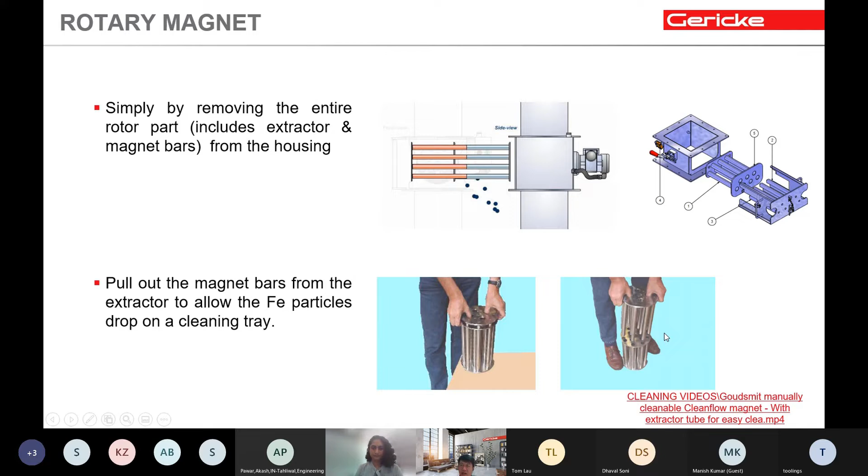That's the Russell sifter. Then we have magnets, also available in an extractable version where you can easily remove and clean it. Then finally, if necessary, you have also the hoppers that come in an extractable cone version, where you can access and push in for cleaning as well. Okay, this is also available.

So you can see what we try to do is implement or recommend dry cleaning, and thus we have designed equipment to facilitate that as well. Any questions before we move on to the last chapter, which is the interesting solutions?

No, I don't think so, William. Good, everything is clear regarding mixing, segregation and sifting as well.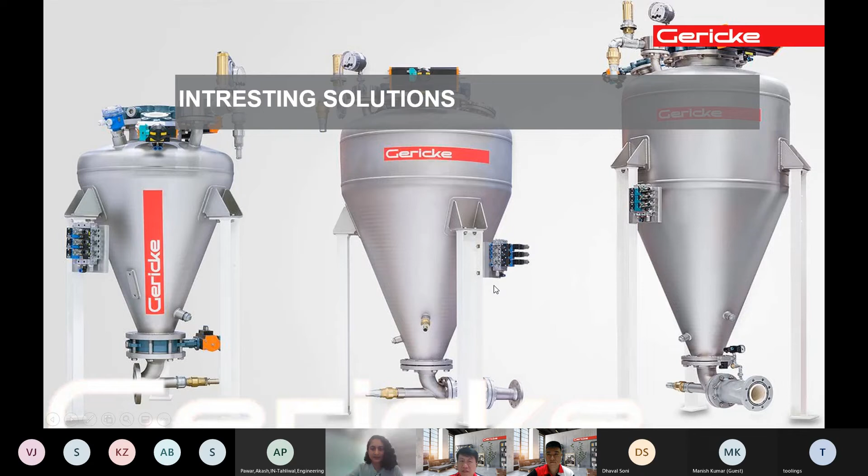Good. So now we touch on some interesting solutions that we have delivered. Micro dispensers, you may have a micro dispensing room and you need a central dust collector. We do that as well. This is where you have a bucket, your operator tips it, and then you have the hood, and we suck the air of the dust into the central dust collector. So this is normally recommended in the micro dispensing room, not in raw materials handling.

Then if you need to sample powders from your product pipeline, this is also available. You install a sampling device onto the pipe and you can sample powders when the powder is dropping downstream. You can activate this and it comes out to collect the samples. Okay, I will not show that.

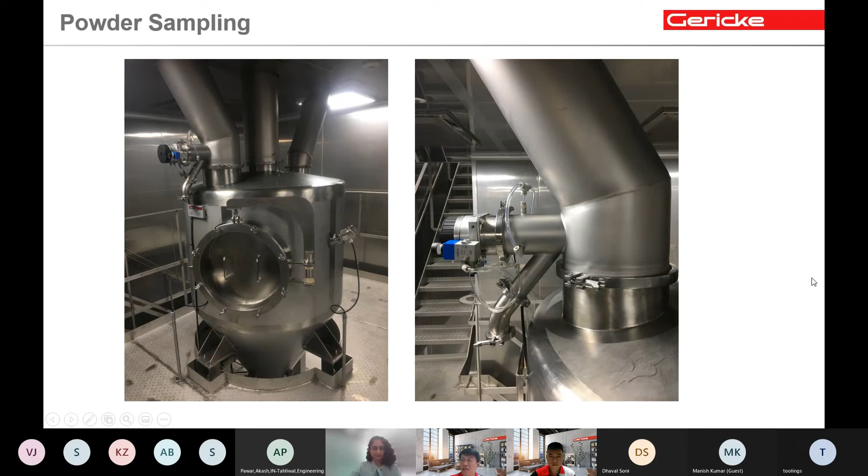We had a question earlier on about how we handle hygroscopic powders. Hygroscopic powders means they absorb water or moisture from the air easily. So what we do here is implement a dehumidifier. The dehumidifier will be at the intake point of the blower, and then we convey, instead of normal air, dry air from the dehumidifier into the system. This is how we do it. Of course, we will design the dehumidifier dryness and so on depending on the product you want and the capacity of the flow you want, and then we integrate the whole solution together. But this is typically how we convey hygroscopic powders.

To add on, sometimes if you don't have the benefit of a dry room, but your powders are very hygroscopic, you can also install the dehumidifier, and we can blow dry air into the receivers that we install. So the receivers can have dry air coming in to give them a dry condition inside.

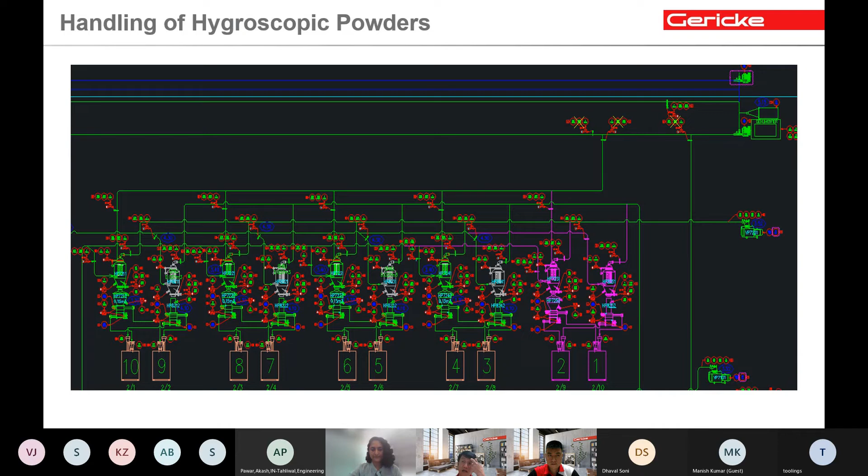Only useful if you don't have a very good dry condition operating area. Okay, so you can see this is the receiver, and this is the piping for the powders to come in, and at the back, this is the piping where we introduce dry air. Of course, there are detailed systems to make sure that the powders don't go back to the dehumidifier, or the dehumidifier does not contaminate your powders.

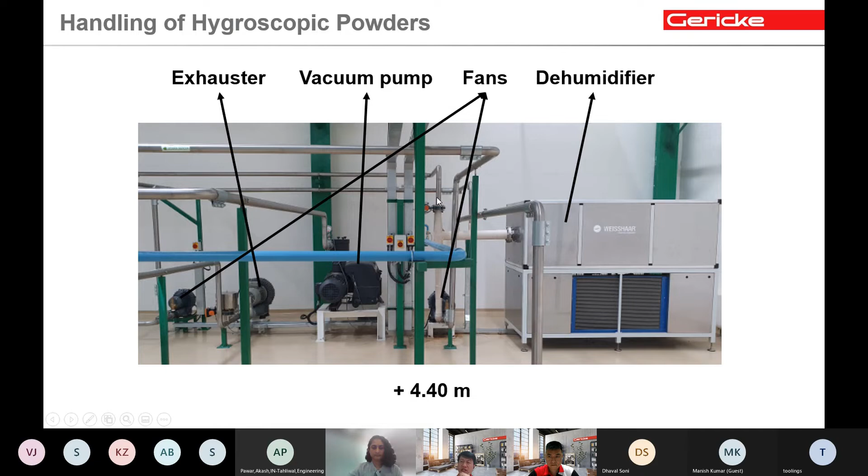Okay, these are dehumidifier installations. So this is a typical setup where you have dehumidifiers connected, then to your blowing line, and then we use it to convey.

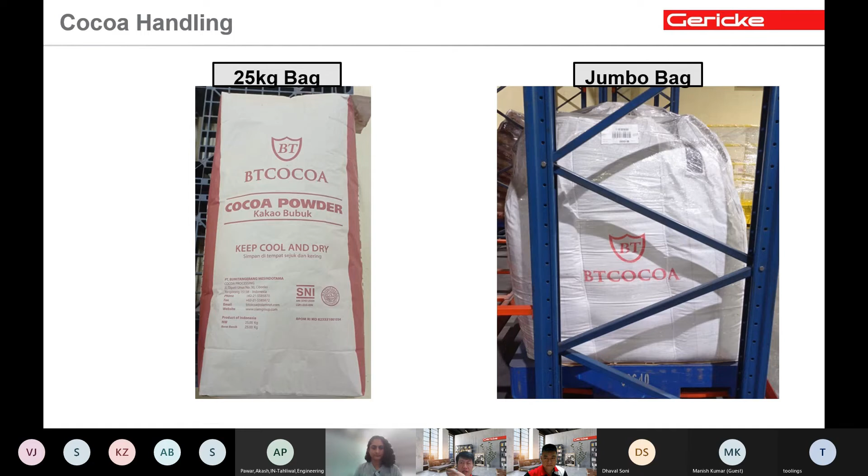Okay, these are the type of cocoa powders that we are doing. Recent project, they come from BT Cocoa. They actually belong to Olam. Olam is an Indian-origin company. Today they are listed in Singapore.

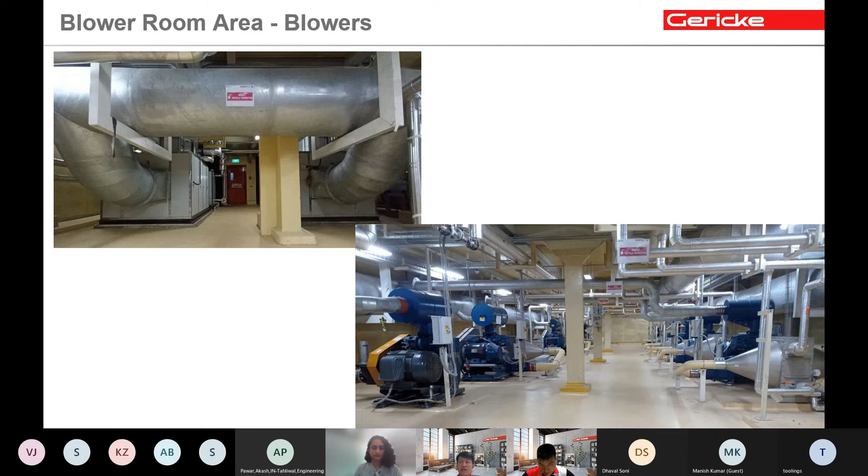So we have the dehumidifier delivering the dry air to the conveying line. Okay, these are the dehumidifiers. These are the blowers. So we actually duct the dehumidifier into the individual blower, thus giving a dry air condition. And this is how we blow the cocoa into the rest of the area.

Another interesting solution that we have implemented is for Kraft Heinz. They are producing ketchups, they are producing soya sauce. So in the past, they have a liquid mixing tank where they have soya sauce, powder, sugar and so on dumped directly into the liquid tanks. But these liquid tanks are very huge, about 2, 2.5 or 3 meters in height. So what happens is they have operators climbing up the stairs and tipping the powder one by one. Very hectic. So safety is an issue, operating efficiency is an issue.

We come in, we design for them an auto preparation system, where we have raw materials coming from big bags. We convey the raw materials, passing them through a sifter. In the past, they cannot do that because it's manually handled. So we have raw material big bag discharger, convey into an inline sifter, convey into a receiver. The receiver will prepare the right recipe of the right amount, and we convey it directly into the tank with no receiver needed on top. So we can go direct into the tank.

How do we use this? We use the dense phase technology because the air is very little and we push the powder. By doing that, we are able to convey minimum air into the tank, and we introduce the powder into the tank. This is used for salt, because they handle salt a lot.

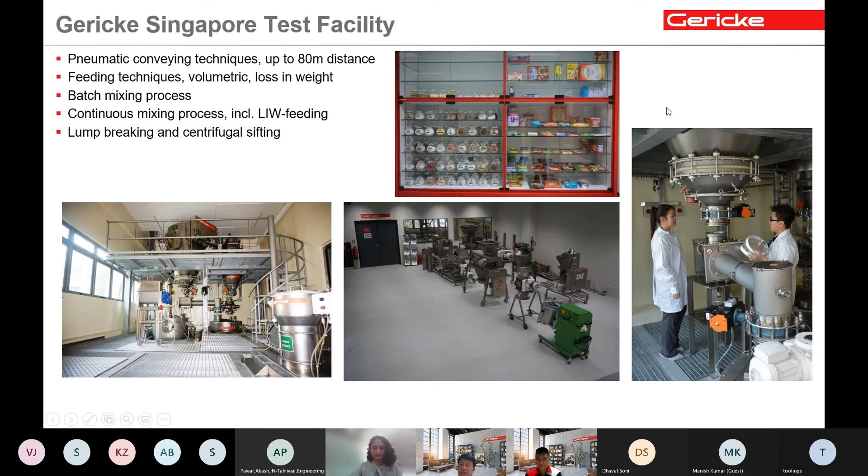Feel free to contact us. Myself and Tom, we are in Singapore. Your closest contact will be Seema and Dhaval. They are located in India, in Hyderabad. Okay, thank you so much.